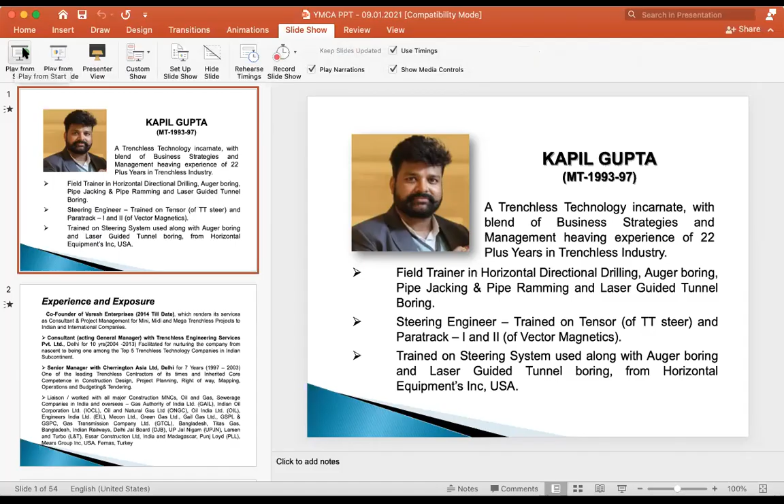Sorry, Kapil, Upendra here. Can you put this into presentation mode? Sure, sir. Sure. Thank you. Thank you very much, sir. Is it okay, sir? Yeah, it's fine. Thank you.

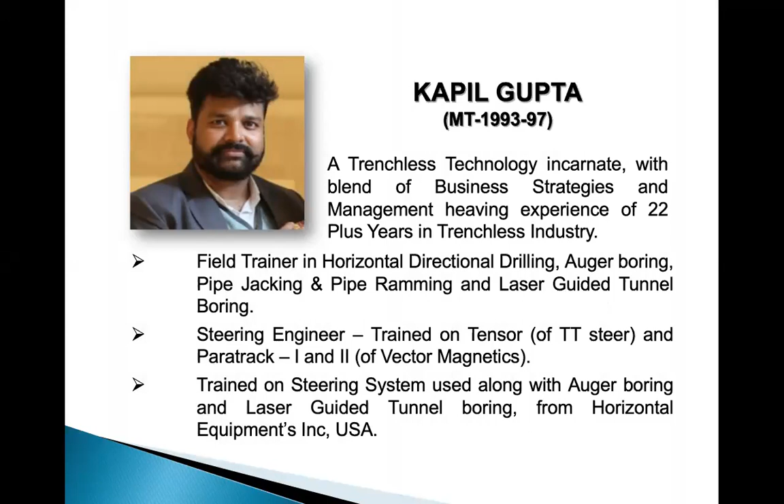Okay. So I've been working in this industry for 22 years. I have trained so many people in this industry in different aspects like drilling, boring, so many things, inclusive of trenchless technology. Right now I'm running my own company, which is called Varesh Enterprises, and I'm taking a lot of HDD projects, horizontal directional drilling projects, drilling under rivers and installing pipelines for oil and gas.

Before that, I was acting general manager with Trenchless Engineering Services Private Limited since 2004. I started that company with one of my friends and took it up to a very high level. It has become one of the top companies in the Indian subcontinent. Before that, I was working with Cherrington Asia Limited. That was the innovator of this technology.

Mr. Martin Cherrington started this technology in 1964. And I worked with his son, William Cherrington, from 1997 to 2003. I learned so many things from him. I have worked with pretty much all the clients which are laying pipelines for oil and gas in India, Bangladesh, Madagascar and so many countries.

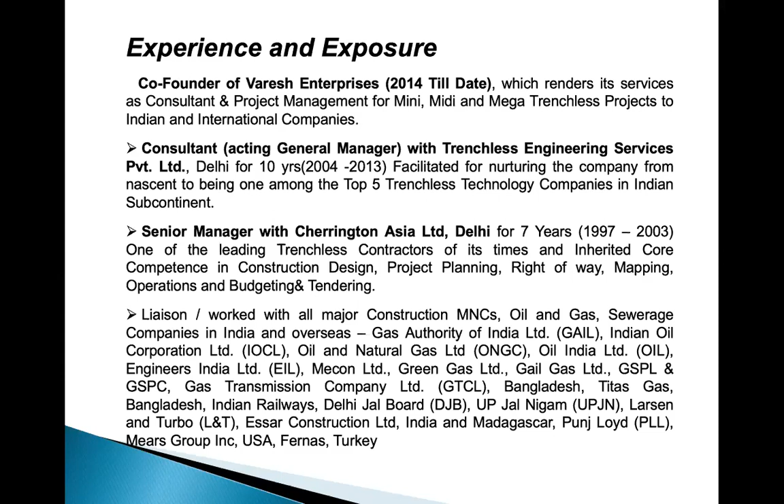So this is a brief introduction about trenchless technology for installation of pipelines under rivers, canals, creeks, roads, highways. There are so many obstacles which need to be crossed without digging them, without creating obstacles to them. For example, if some public sector company like Indian Oil or GAIL has to lay a pipeline from Jamnagar to Loni or Kandla to Bhatinda, from some refinery to some kind of delivery station, they have to lay a pipeline.

The earlier methods were cut and cover methods. They had to open the trench, excavate the trench and lay the pipeline even under the river, even under the highways. They had to stop the highway or railway work to do those jobs. But right now the technology is available which creates very little hindrance to that kind of traffic, or you can say without disturbing the traffic.

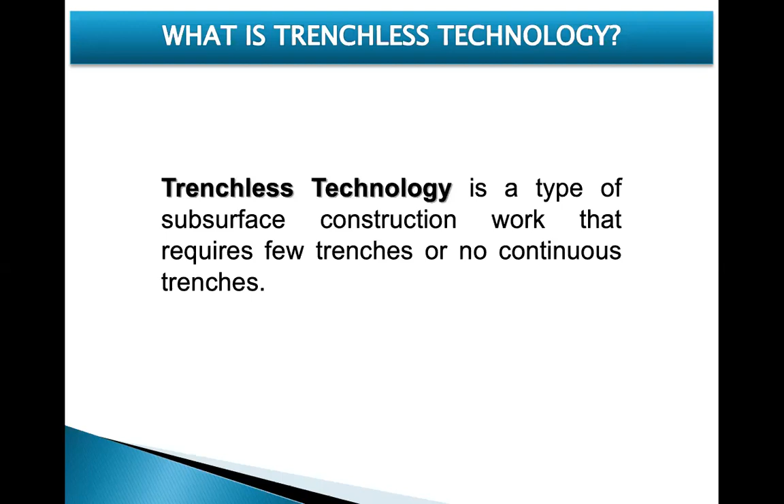So there are various kinds of methods covered under trenchless technology. These various methods are used depending upon their utility, like box pushing, auger boring, pipe ramming, pipe jacking, micro tunneling, and pipe bursting. So I'm going to explain a little bit about these technologies.

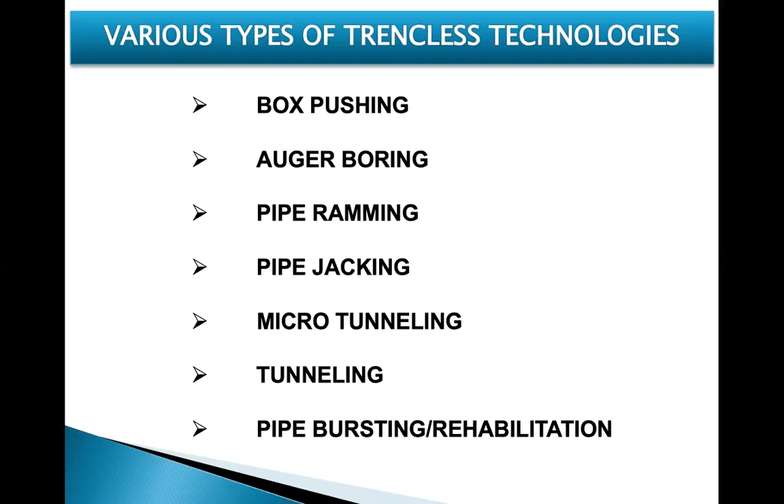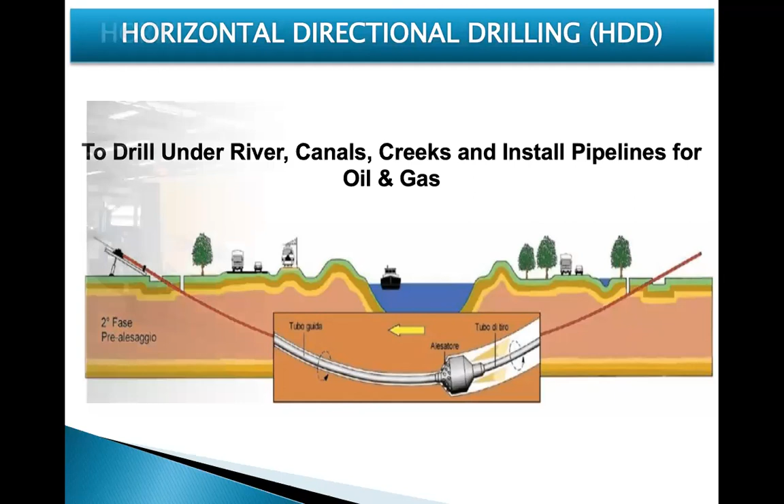This is horizontal directional drilling. We drill under rivers and install pipelines for oil and gas, especially with this technology. I think everybody has seen this kind of machinery nowadays standing on the roads, installing cables, OFC ducts and all. This is the bigger machine. The machines working near the roads are 10 to 15 ton or 18 ton. The machine I am talking about is 100 ton, 200 ton or 500 ton capacity.

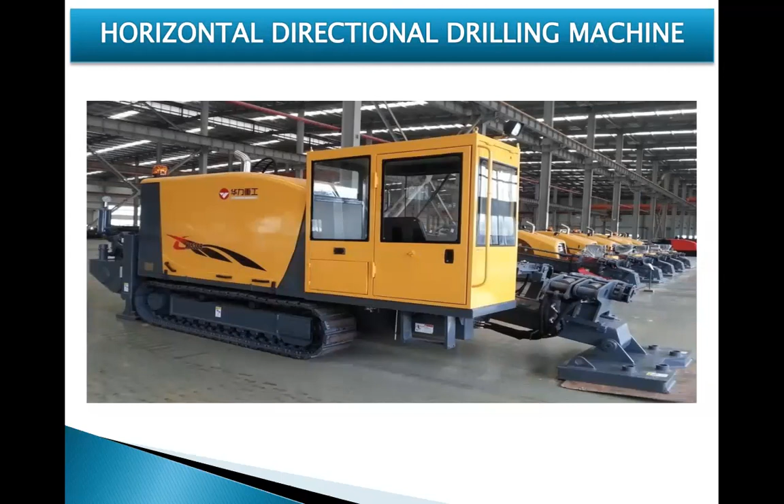Horizontal directional drilling, HDD, is mostly used for longer or medium range under-river pipelines. It can install 100 meters to 2500 meters in a single shot. We can place the machine at one place and drill up to 2.5 kilometers in a single shot. The world record is 5200 meters in a single shot; sitting at one place only, they drilled 5.2 kilometers and installed 2 pipelines in Hong Kong.

Of course, as we go longer, the cost will be higher. For laying only this 5.2 kilometer pipeline, the cost was around $165 million. The pipe diameter we can install with this technology is 4 inches to 80 inches. We can install OFC cables, HDPE ducts, MS pipes, at depths from 1 meter up to 150 or even 200 meters. It was used mainly for oil and gas pipelines, but nowadays it is majorly used for OFC cables and has started for sewerage, water and power cables also.

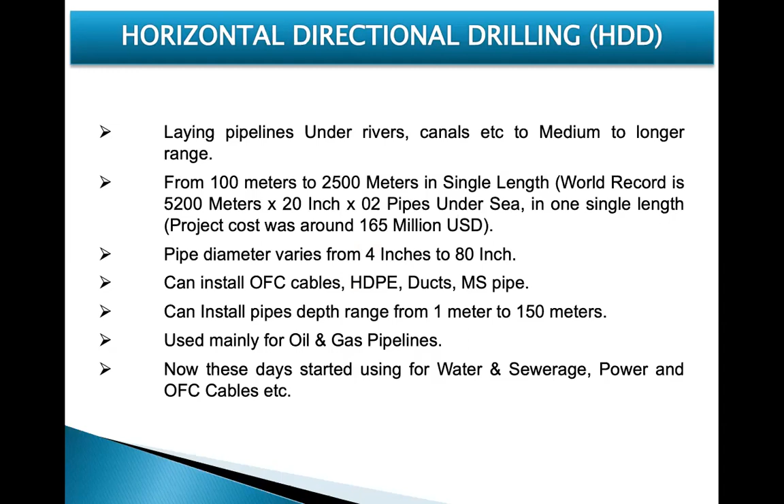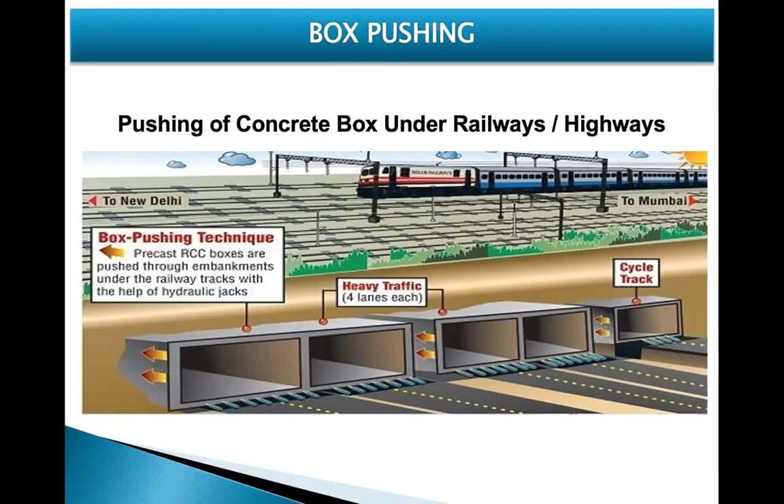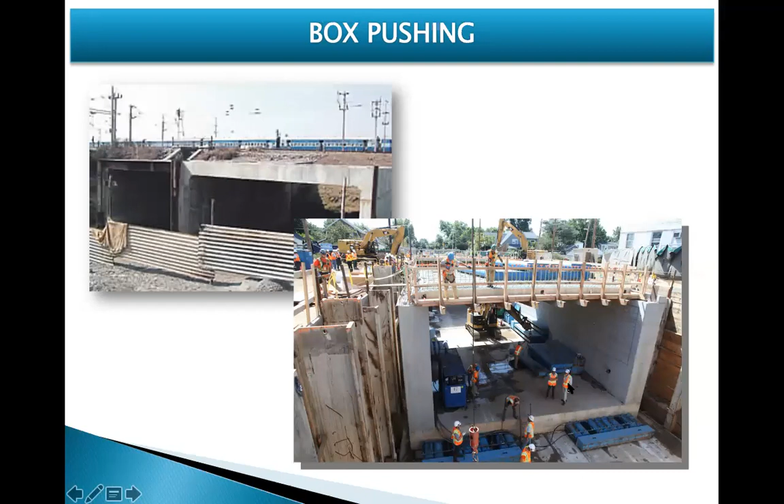These pictures are from the original site. In the top picture, you can see the railway, and the precast concrete box has already been cast. In the second one, you can see the blue colored jacks. The box is being pushed under the railway.

So this is, of course, most of the time used for laying subways under running railways. Box size may vary from 1 meter by 1 meter to 8 meters by 8 meters. Length varies from 15 to 50, 60 meters, or maximum 100 meters. Only an RCC box needs to be installed.

We need to cast an RCC platform to take the pushing load of this kind of concrete box, so that it can take the load of pushing. Most of the work done in India is manual, while in China there are machineries nowadays. They can install that machinery, it can cut mechanically and drive through, and we can push the concrete box behind that tool.

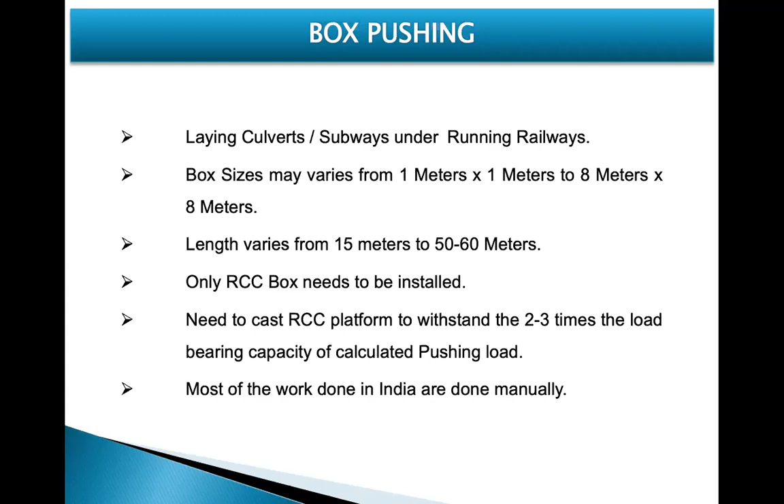This is auger boring. This is another raw form of trenchless technology, which is used to do a cased crossing under railways and highways to install oil and gas pipelines. The advantage is that this is a very cheap method to install pipelines. Most of the time, cased crossings are used, meaning highways and railways usually don't allow installing the product pipeline directly. In case of maintenance, they always prefer to have a casing first and then install the pipeline inside

the casing. So the dia range is 12 inches to 60 inches, length from 10 meters up to 50, 60 meters only. But it is a very raw form of trenchless technology, so accuracy is not there. Line and grade we cannot manage. You never know; you start at one level and you come out on the other side at a different level, maybe up or down or left or right. So it is just a raw form of technology.

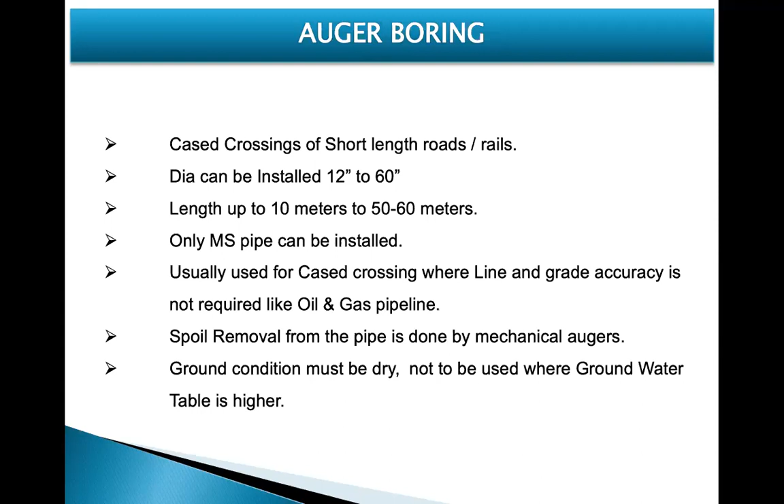Spoil removal: the soil we cut usually comes out through the mechanical augers inside the pipes. Ground condition must be dry. In HDD, the ground condition doesn't matter. The water table may be higher, because most river places have a high groundwater table. But in auger boring, the ground condition must be dry.

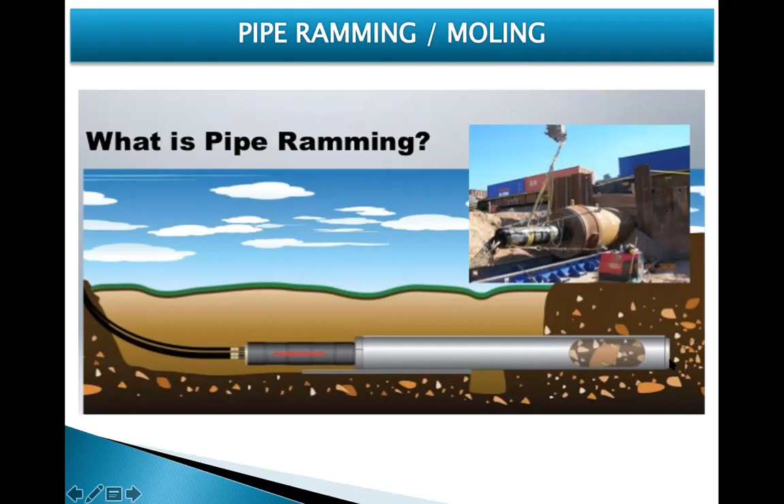This is another form of trenchless technology, which is called pipe ramming. These kinds of pneumatic hammers are used to hammer the pipe into the ground. This pneumatic hammer keeps on hammering with a force of, say, 200 tons, depending upon the size of the hammer and the pipeline. It can go up to maybe 2000 tons of force. So the soil is cut and comes inside the pipe, just like it is shown in the illustration.

So it's a pneumatic kind of technology. We use compressors for this. Cased crossings for short-length road and railway, 12 inch to 60 inch, length up to 50, 60 meters only. Heavy wall thickness MS pipe is installed because a lot of load is given by these hammers. Usually cased crossings, where line and grade accuracy is not required. Spoil removal is by pigging: after installing the pipeline, we insert a pig and clean the pipe. Ground condition must be dry for this technology also.

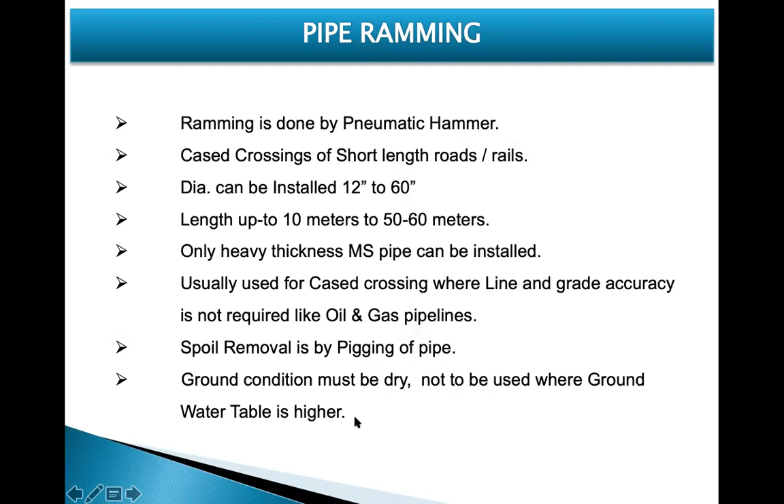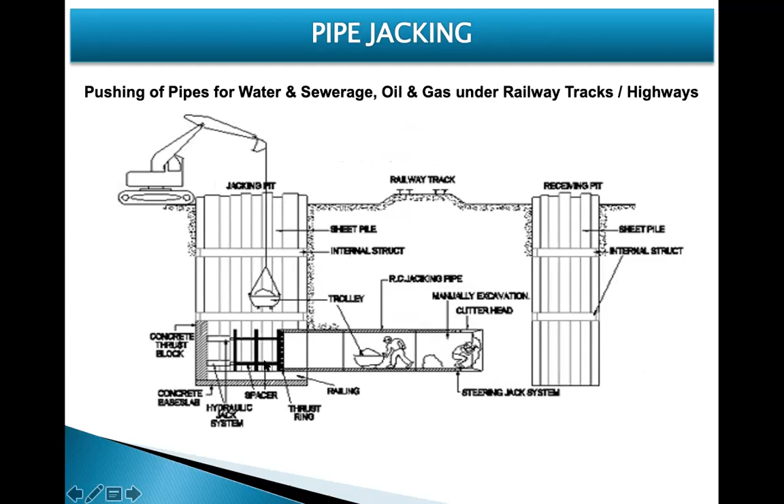This is another technology which is called pipe jacking. This is a manual excavation method. We have to make a pit on both sides, install the machine here, and keep on pushing the pipe. The manual labor keeps excavating the ground in front and we keep pushing the pipe. So they are taking out the muck through the pipe only by labor. You can see here in this pipe, they are bringing out the cuttings and taking them out of the hole.

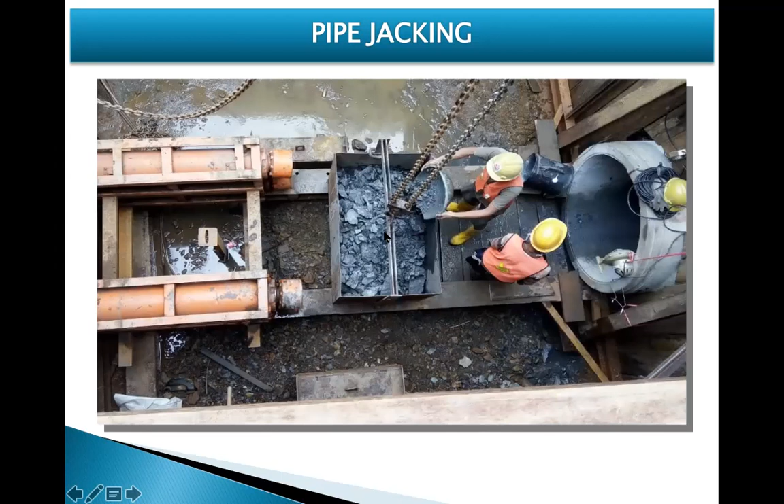This is also mostly used for cased crossings. Dia must be bigger than 24 inches because it should be a man-entry pipe. Labor goes inside the pipe and digs by hand manually, so it should be more than 24 inches. From 10 meters to 100 meters length can be achieved with this method. RCC pipe and MS pipe can be installed. Mostly it is used for water and sewerage pipelines in dry water table conditions. There should not be a groundwater table. And spoil removal is by manual labor only.

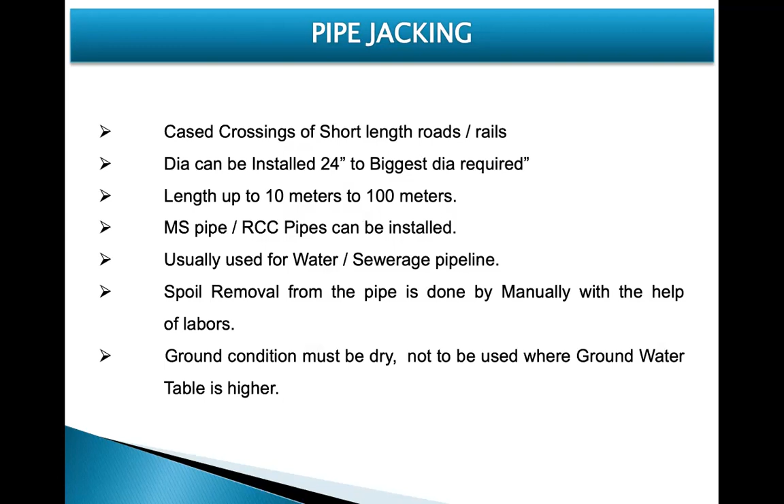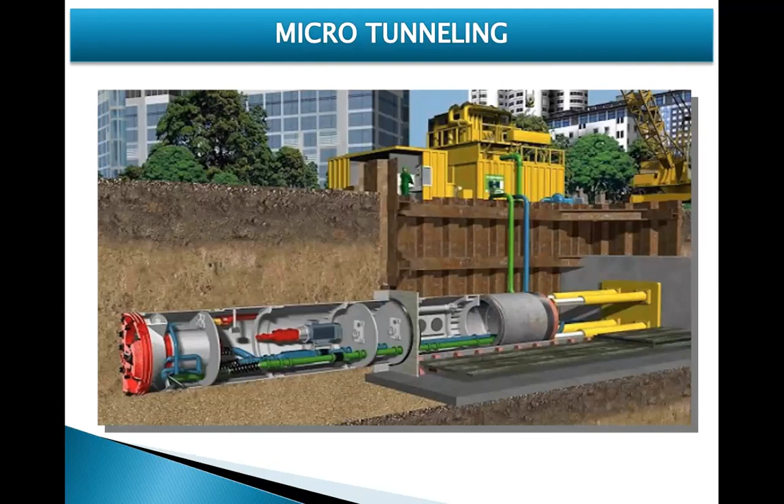This is another technology which is called micro tunneling. Mostly it is used for laying sewer lines where line and grade accuracy is required, and most of the time it is used where a very high water table is there, like slurry conditions. So it uses earth pressure balancing machines which keep maintaining the line and grade even in slushy soil, like very soft soil.

Very high accuracy is there, so where gravity flow sewers are there, it is being used. In unstable ground conditions like cobbles, gravels and boulders, micro tunneling is successful. From 400 mm to 4000 mm diameter pipeline can be installed. MS pipe, concrete pipe, any kind of pipe can be installed with this technology. Maximum length can be up to 500 meters from a single shaft.

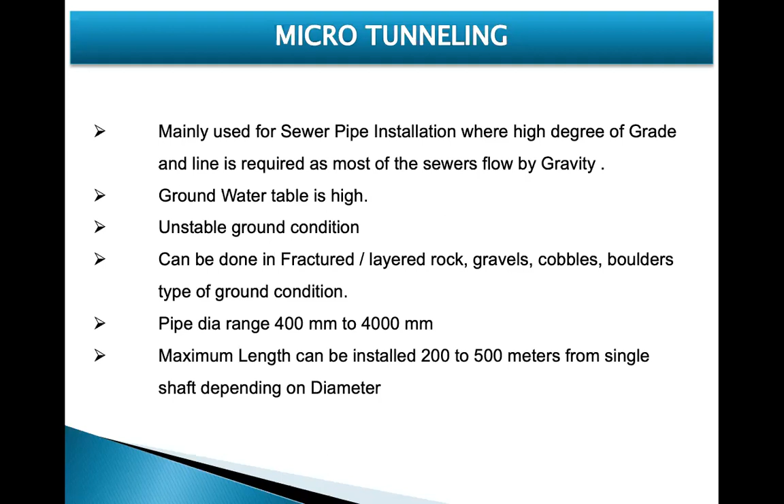This is tunneling. These days it is very popular in metros. This is the earlier method where the excavation was there; the equipment is going there, excavating manually and doing the tunnel. Nowadays, this kind of machinery is being used to make a tunnel bore like this. So it is a very fast method, maybe 100 times faster than the conventional method.

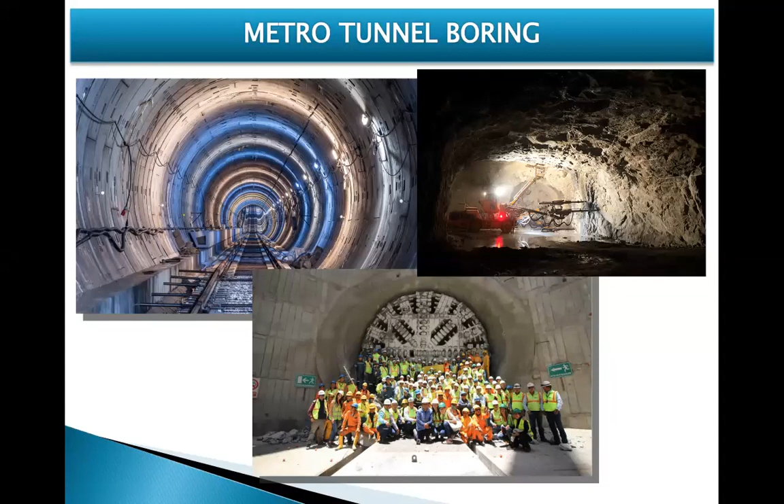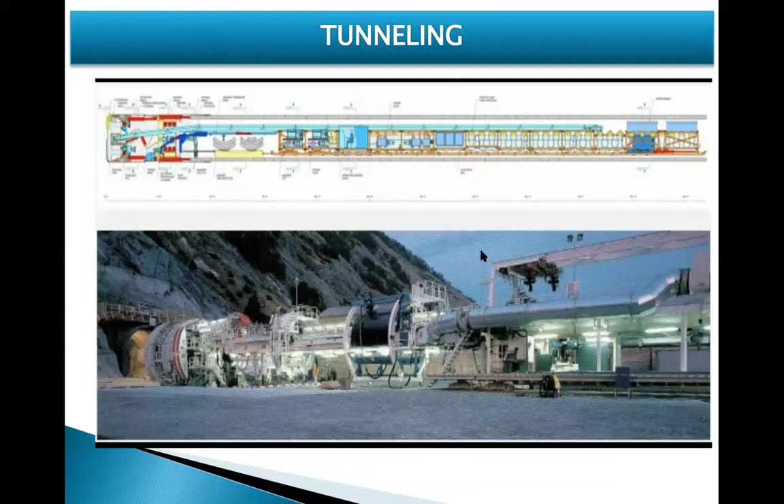So this is the actual kind of machine, which may be a 400 meter long machine. It has everything in it. Metro tunnels and most tunnels where typical underground conditions are there, maybe some water table or cobbles or unstable ground, it is being used there. From 1.7 meter diameter to 19 meter diameter, which is the maximum diameter tunnel boring machine made in the world till now.

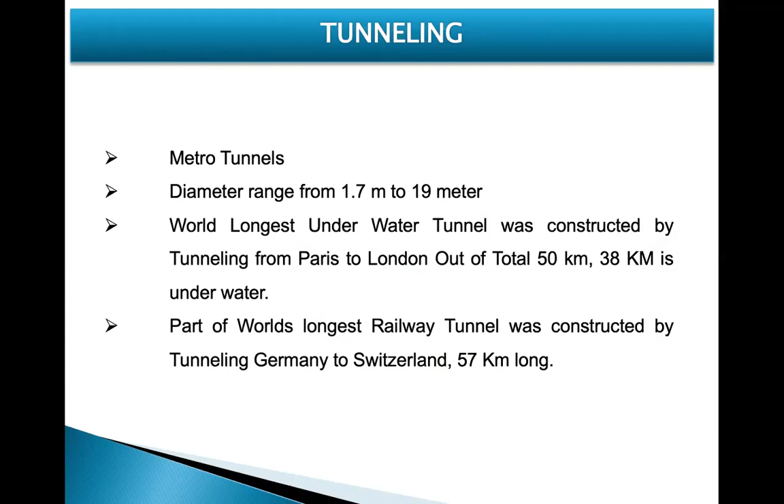The world's longest underwater tunnel, the Channel Tunnel from Paris to London, 38 kilometers underwater, was installed by this technology. Part of the world's longest railway tunnel, the Germany to Switzerland railway line, 57 kilometers long, was constructed by tunneling.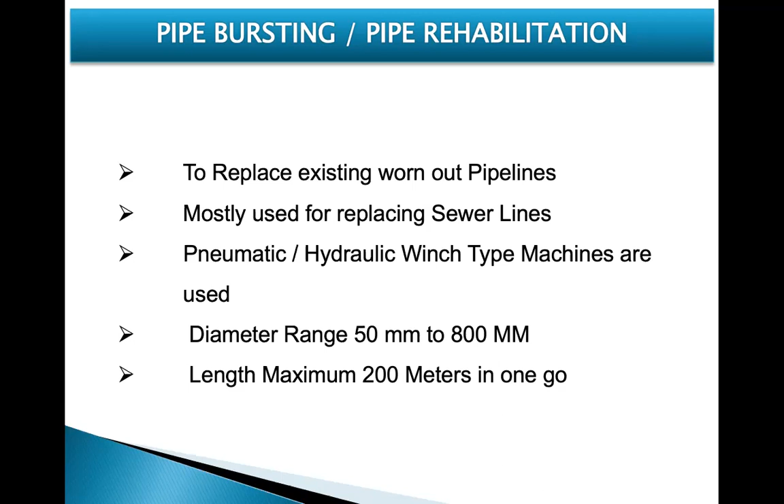So based on the requirement, the technology is used and the contractor is hired according to the requirements. If I have time, I can explain a little bit about why horizontal directional drilling under rivers.

Am I audible? Yes, you are audible. Crystal clear.

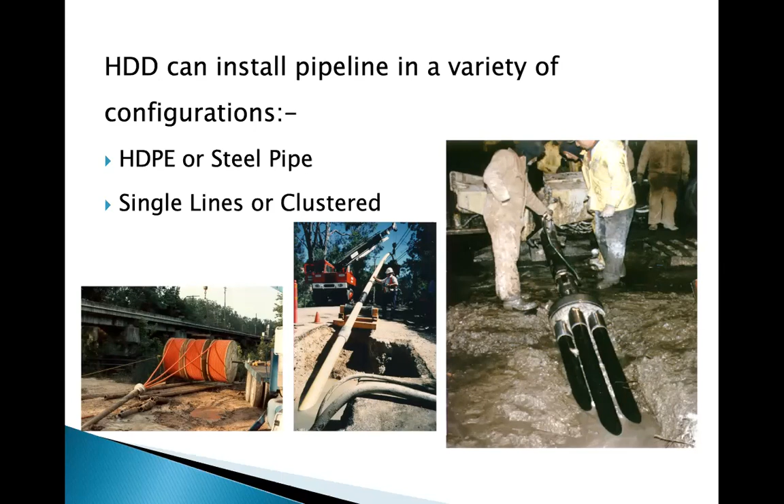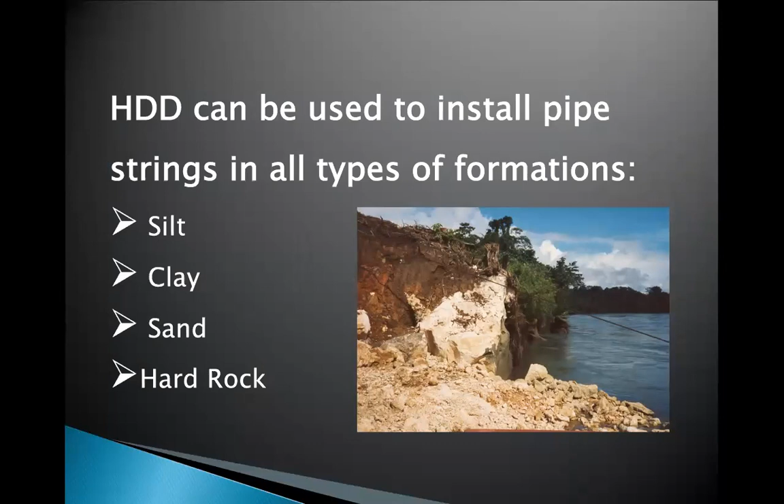So why is HDD installed? Because it has a variety of uses. We can install HDPE pipe, steel pipe, single lines, OFC ducts, any kind of pipe except ductile iron or concrete pipe. We can directly install OFC, and electrical cables also. It can drill through any kind of soil formation except boulders and gravels, like sand, clay, silt, hard rock.

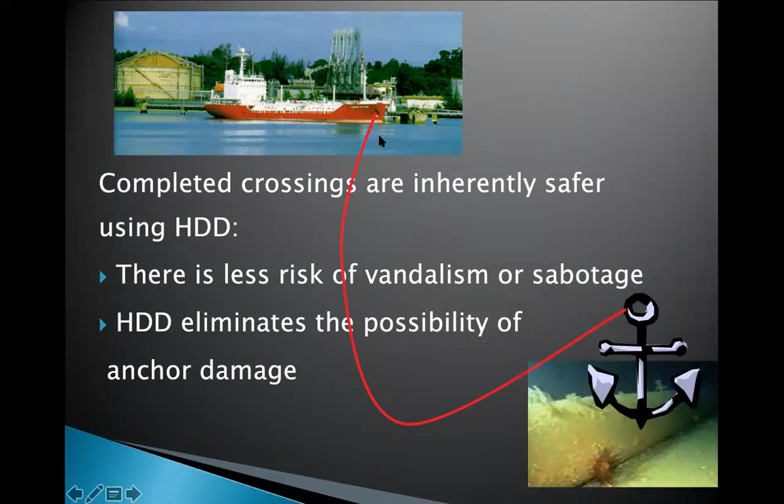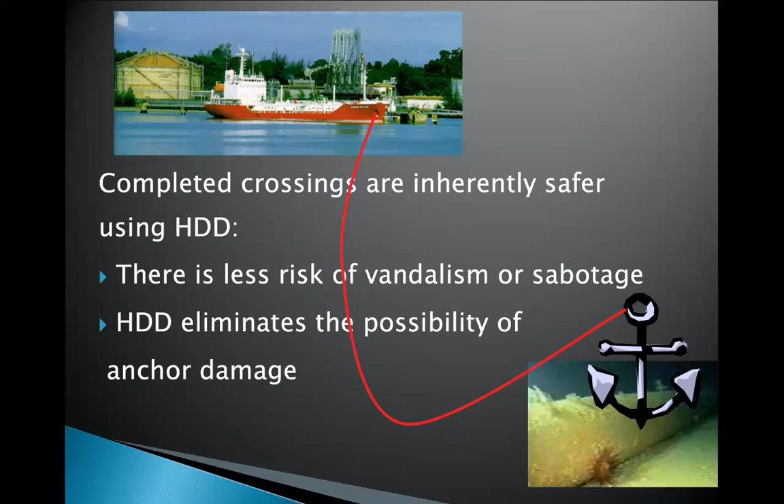So why is HDD actually required? The cut and cover method was risky. If the pipeline is laying on the bed level of the river or sea, there is always a chance of rusting as well as anchoring. If a ship is coming over there and drops its anchor, it can hit the pipeline. So there are always chances of sabotage or damage to pipelines, which will harm the environment as well as cause loss to the clients. So the pipeline can be exposed.

Most rivers are changing course, so the pipeline can be exposed from the bank if it is at the usual installation depth of 1.5 to 2 meters from ground level, whereas we install the pipeline very deep, depending upon the scour level of the river. They usually take hydrological data from the river authorities and see in how many years the soil will erode or if there is a chance of the river changing its path.

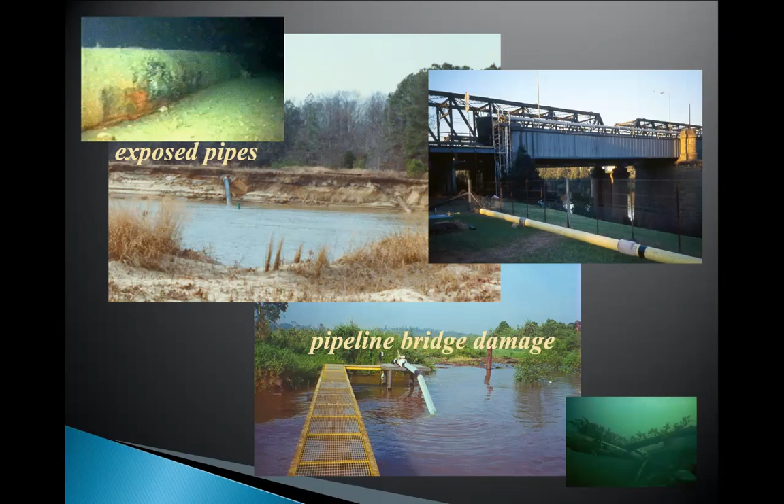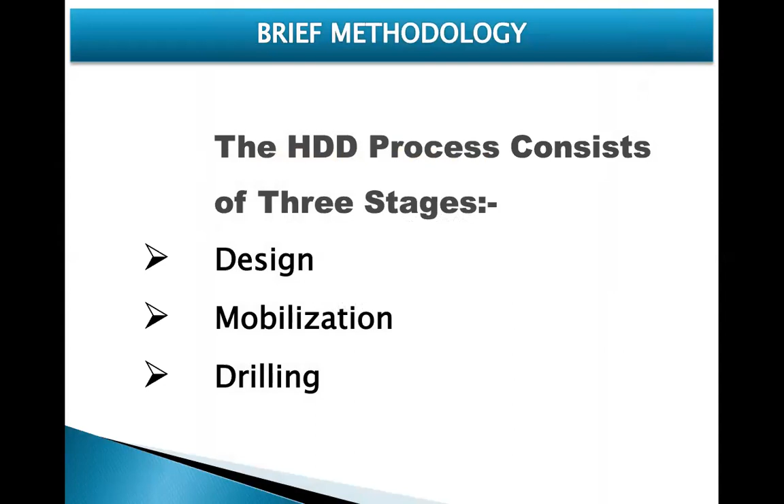So they will ask us to design the pipeline so that the life is minimum 50 years. We design at what depth we need to install, depending upon the maximum depth. So pipe exposure can be avoided by HDD installation. This is the brief methodology. It consists of three stages: design, mobilization, and drilling.

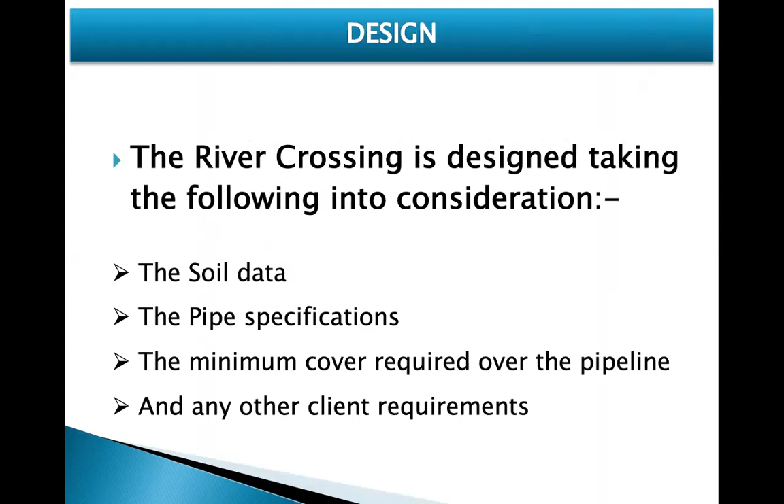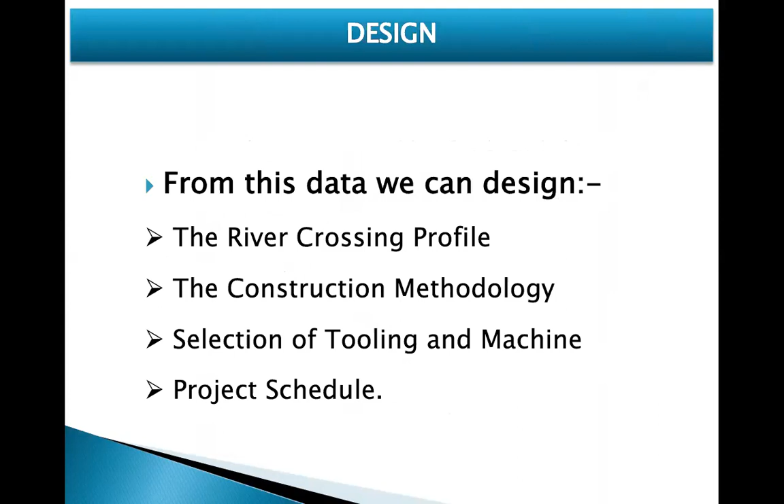Depending upon the soil data, pipeline specification, depth requirement, or any other specific requirement, we design the crossing profile, like at what radius of curvature we have to install the pipeline and the minimum length required to do the HDD. So we usually make this kind of river profile, and based on this and the depth requirement, we design a pipeline profile going in an arc. We install a machine here, drill like this, and come out here.

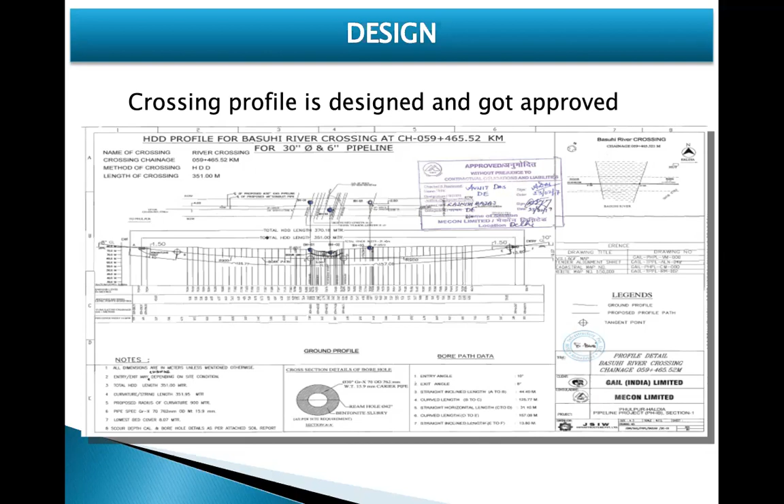So in this design, we take care of the tensile strength of the pipeline, so that we can see what kind of radius we can give to the pipe, because it is going in a curvature. In this kind of design we see all the parameters of the pipeline and take all the stresses into consideration, so that it will not damage the pipe during installation as well as after installation. It should not damage. So we take all the parameters into consideration and do the design part,

and of course calculate the pulling load. So if it is a 100-meter pipe of 30-inch diameter, and it is coming to a load of say 50 tons in pulling, we take a factor of safety of 1.5 times and deploy a rig of say 75 tons to do that job.

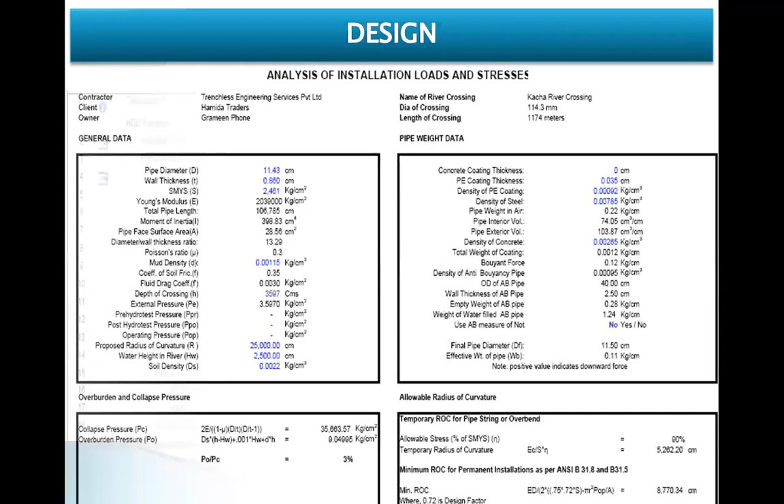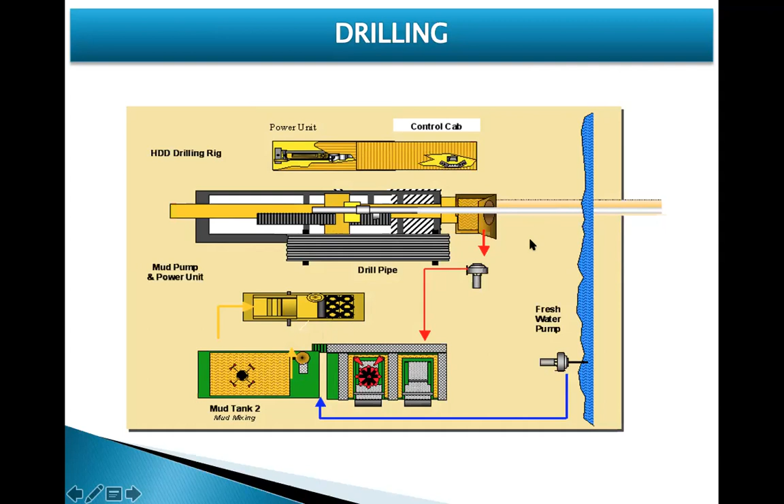Say this is the pilot hole. This is the virgin ground, and we are making a pilot hole first, depending upon the design we have made and what depth we need to achieve. Once the pilot hole is complete, we enlarge the hole in different stages, which is called the reaming process. And then, of course, we pull the pipe, which is already pre-welded on the other side of the river, inside the reamed, bigger hole.

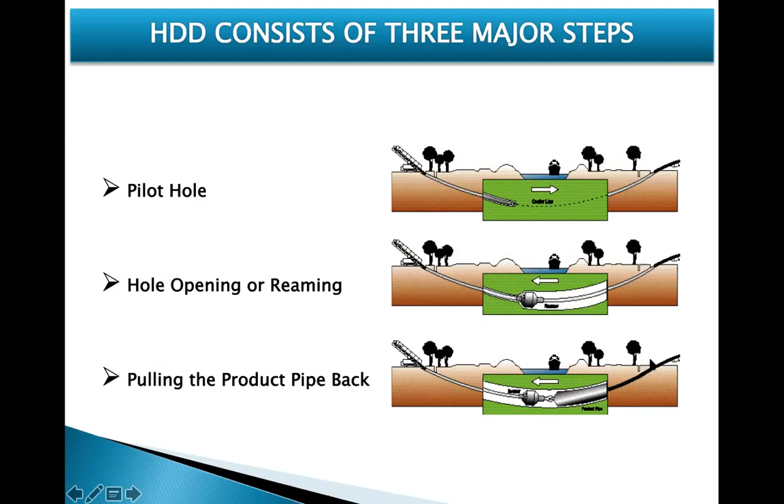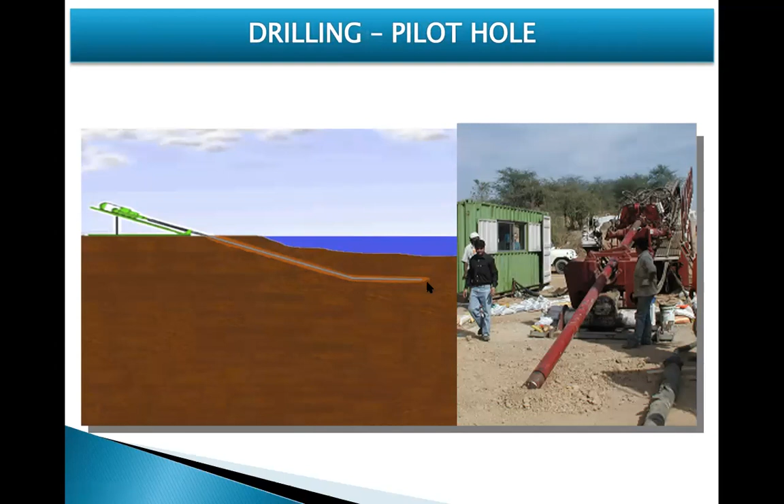Just like this. This is the rig side. We have installed the rig on one side of the river, and we are drilling like this. This is a jet bit. Oh, the video is not playing.

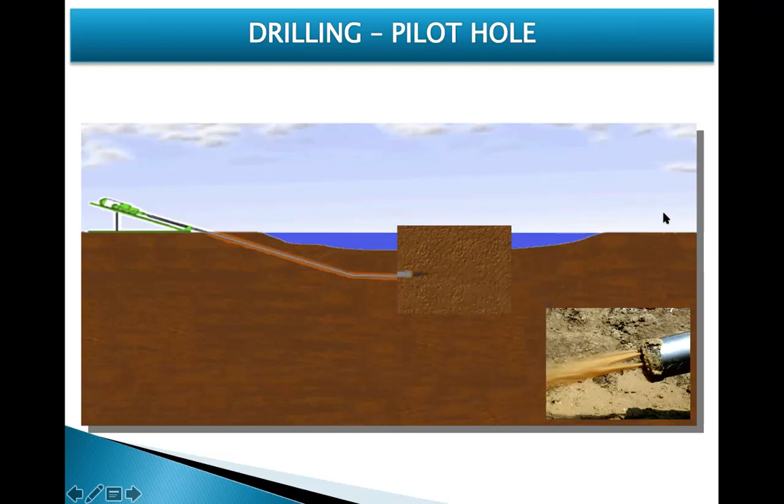Okay. So this is the jet bit where mud is coming out with pressure of maybe 2000 psi, and most of the time we pump this mud at maybe 400 GPM volume, at around 1500 to 2000 psi, depending upon the soil condition. So from the virgin ground, we follow the design path and come out on the other side of the river.

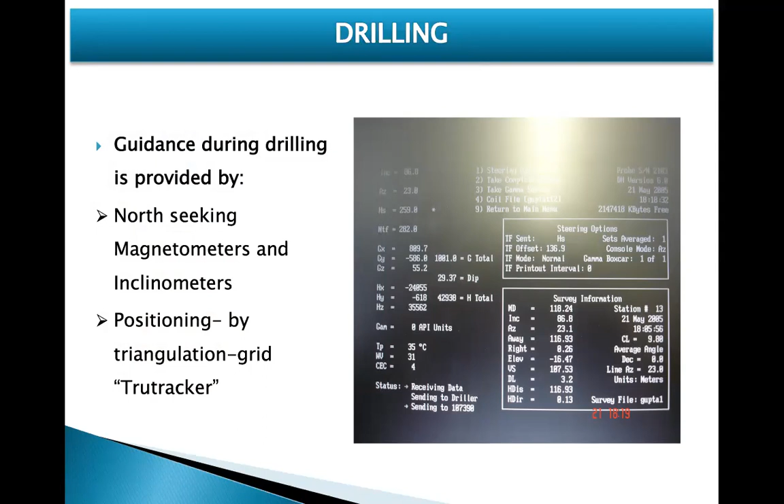This is the guidance system, since it's virgin ground. We have a guidance tool, which is called Trutracker or ParaTrack. It's a magnetic guiding system installed in the lead piece of the drilling head. We keep calculating all the data with reference to the Earth's magnetic pole and true north, so that we come out exactly per the design we have given to the client. We can achieve the exact depth and follow the exact line.

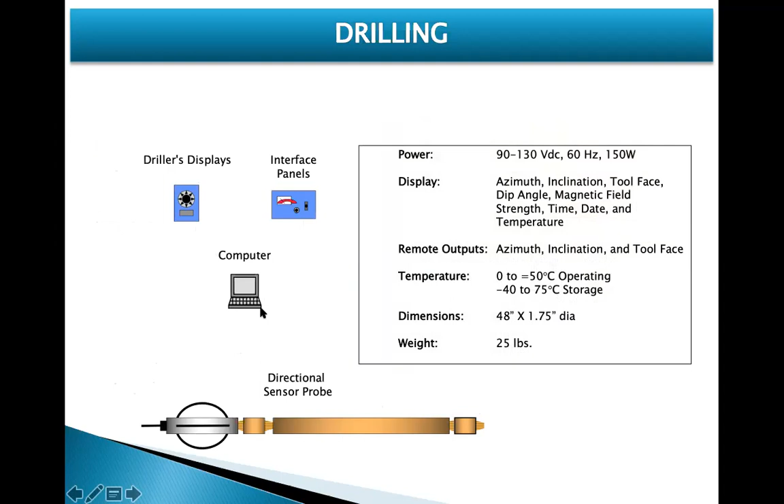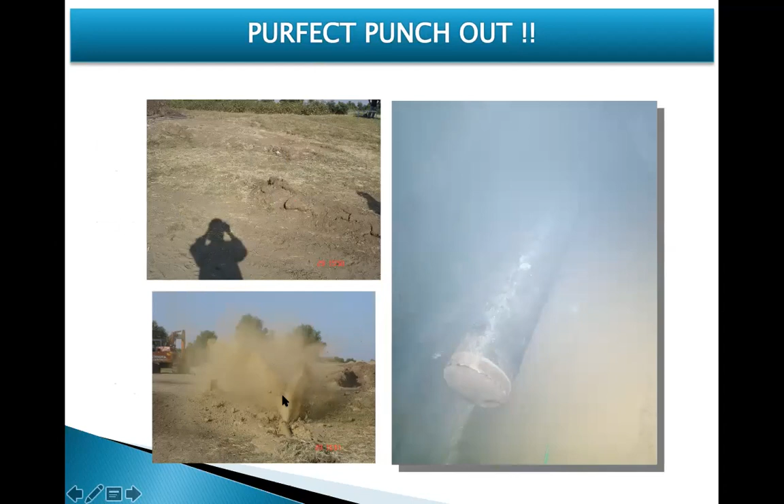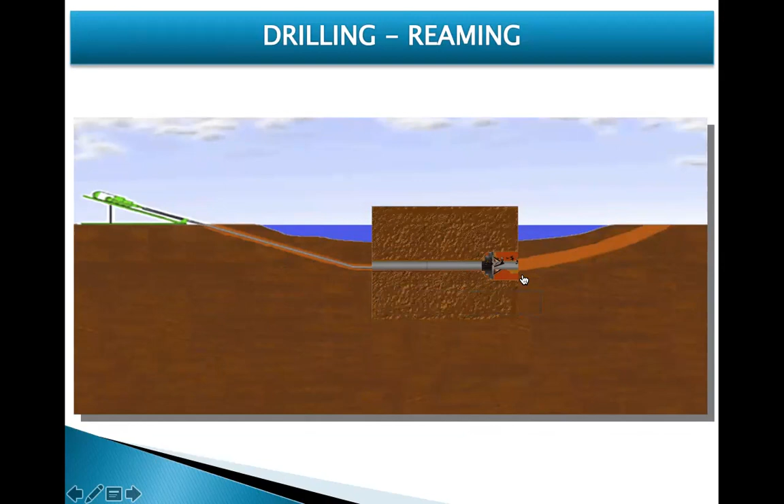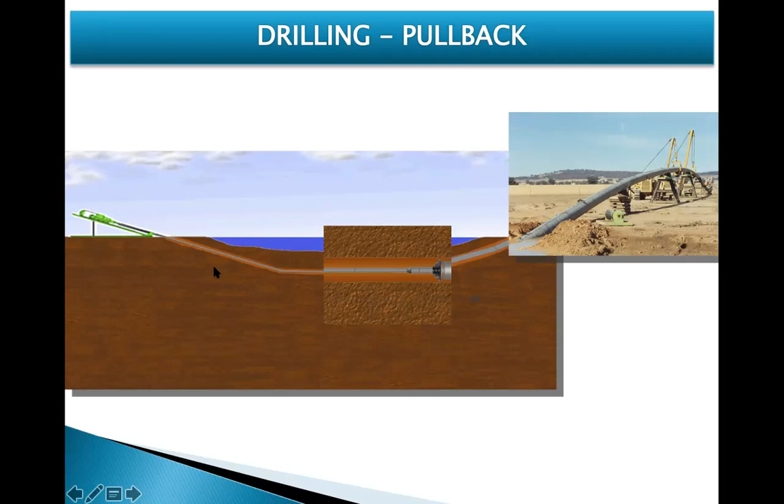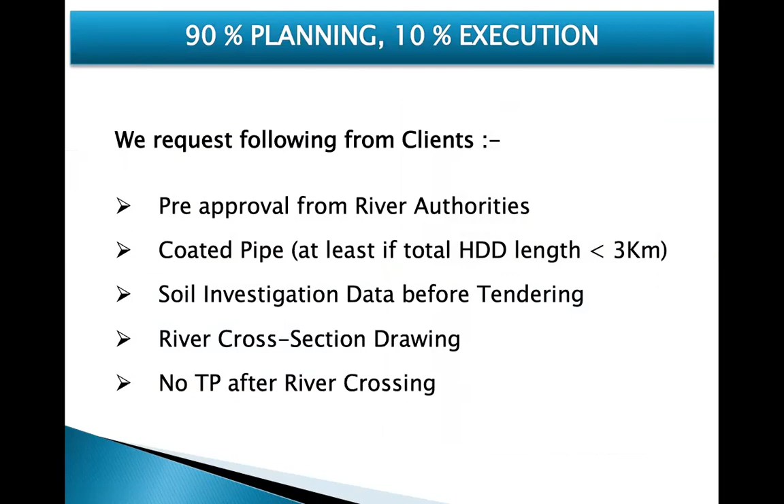So we request every client to plan. Nowadays every client is very educated, and most clients give us the length we need to install. Earlier, we needed to do most of the designs. Now they are doing every cross-section and giving every information, and it is easier for us to give the right prices for the HDD. So the best way to cross a river is by going under it.